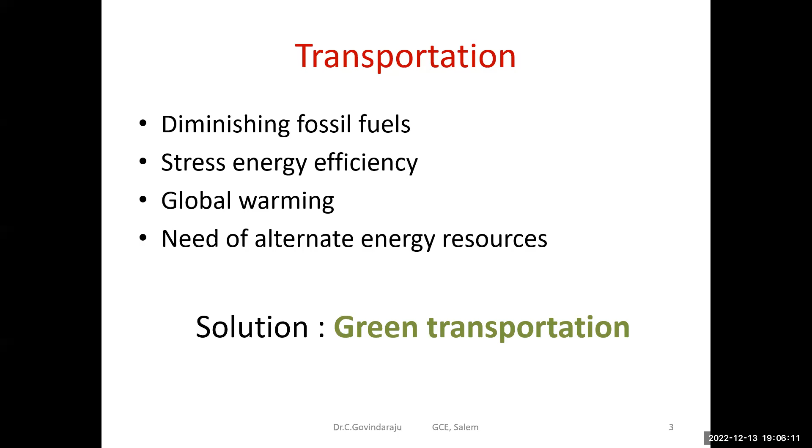So we think about alternate energy resources which can be used for transportation, that we can claim as green transportation. It means a vehicle which will not produce harmful gases to the environment. That kind of transportation we term green transportation. The electric vehicle is one kind of green transportation. An electric vehicle uses one or more electric motors as traction motors instead of IC engines, as in conventional vehicles, for propulsion.

We can classify electric vehicles as pure electric vehicles, hybrid electric vehicles, with the fuel cell electric vehicle as a kind of hybrid electric vehicle, and the third category will be plug-in hybrid electric vehicles. This is the broad classification of electric vehicles. The pure electric vehicle depends upon the operation of the electric motor alone for propulsion.

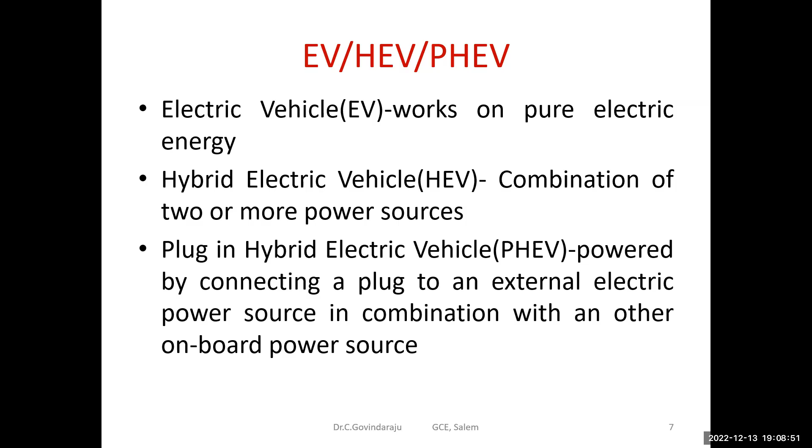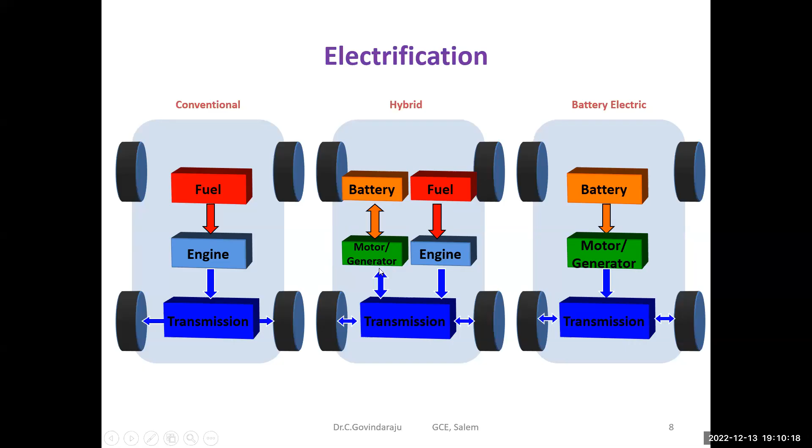electric vehicle. Whereas in the hybrid electric vehicle, we have two options for producing that mechanical power. One will be a conventional engine that is operated with conventional fuel. In addition to that, in parallel to that, the electric motor. These two operate independently and provide the mechanical power for the propulsion.

This is the basic structure of a hybrid electric vehicle, which combines two power sources or energy sources for electric propulsion. Basically we have a combination of a diesel engine with an electric motor. That is one combination. Another combination will be a fuel cell and battery. We are replacing the diesel engine with the fuel cell as the main source, and the battery is the secondary energy source for the electric vehicle.

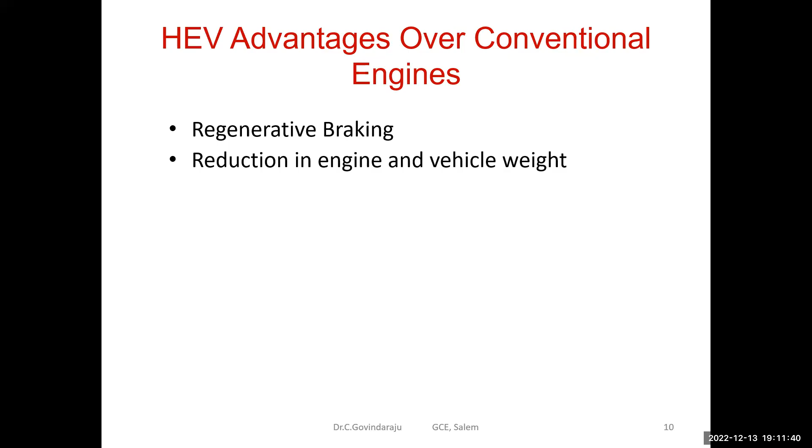Why do we need a hybrid electric vehicle instead of a pure electric vehicle, or instead of the conventional engine? First, it's capable of regenerative braking. In conventional vehicles we are using mechanical braking and the corresponding control is needed, whereas in a hybrid electric vehicle regenerative braking is possible, so it is more energy efficient compared to IC engines. Electric motors and the power converter supporting and controlling the electric motor have less weight, so that reduces the vehicle weight.

Definitely the fuel efficiency is increased. Actually, how the fuel efficiency is calculated in the conventional engine is very simple, because the fuel is the input to the IC engine, and some losses will be present. The remaining power is converted into mechanical power. That will be considered for finding the efficiency.

Whereas in the hybrid electric vehicle, we calculate the fuel efficiency starting from the fuels needed for electricity production, and also the conventional fuels needed. All the stages are to be considered for finding the fuel efficiency. Compared to the conventional vehicle, the electric vehicle and hybrid electric vehicle have more efficiency and fuel efficiency.

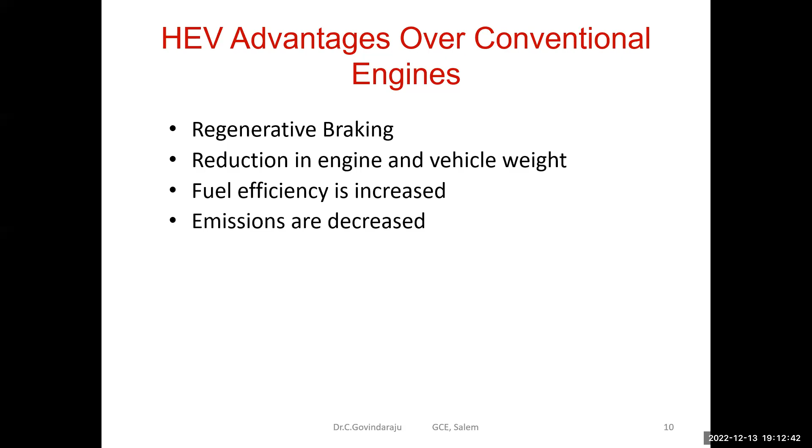Emissions obviously decrease. When you are using a hybrid electric vehicle, even combined with an IC engine, global warming pollutants are reduced by 1/3. Another thing is we are very dependent on fossil fuels, so by using hybrid electric vehicles we can reduce that dependency. Also, IC engines have low thermal efficiency, whereas electric motors have higher efficiency, so the overall energy conversion efficiency will be better compared with conventional engines. These are some of the features, so we are moving towards hybrid electric vehicles.

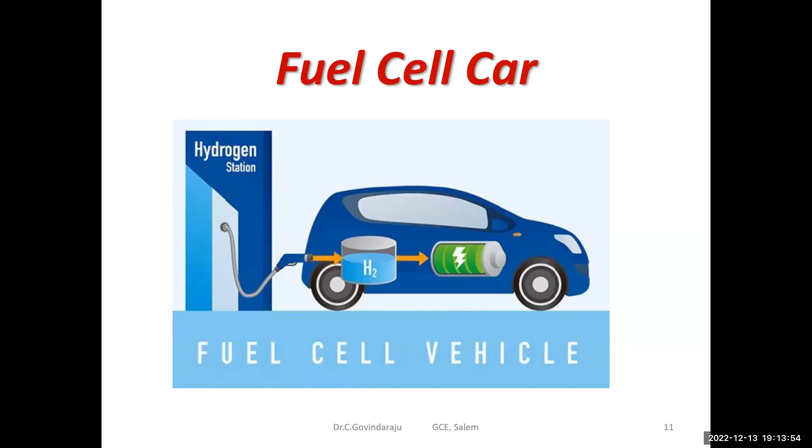Here we are looking at a fuel cell car. The fuel cell is the energy source for this car, so this vehicle is termed a fuel cell electric vehicle. A fuel cell is an electrochemical device which converts chemical energy into electrical energy in a single stage.

A fuel cell is very similar to a battery, but there is a big difference between a fuel cell and a battery. A fuel cell is an energy conversion device, which converts the fuel, normally hydrogen and oxygen, into electrical energy, whereas the battery is an energy storage system. It just stores the energy during charging, and when it is needed, the energy is taken back from the battery, that is, in discharging mode.

Here, the fuel cell produces electricity which is used for driving the motors and also powering the remaining electrical systems or accessories present in the electric vehicle. So we can claim the fuel cell electric vehicle as a hybrid electric vehicle. Again, it is purely electric in nature. It won't produce any pollution like a conventional hybrid electric vehicle, which operates with a combination of IC engine and battery.

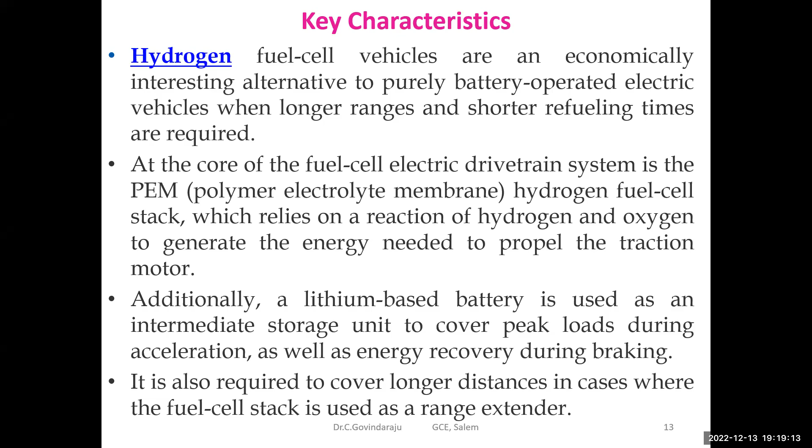Hydrogen fuel cell electric vehicles are clean in nature because they won't produce any harmful gases, and also won't produce a noisy environment. It is noise free operation, and it will not produce any pollution, so it is environmentally friendly.

And also, fuel cell electric vehicles are more efficient than conventional IC engines. We can easily refill the fuel. Here hydrogen is the fuel, we can easily refill it quickly, and it is suitable for long distance travel.

Another thing will be, we are claiming that hydrogen vehicles or fuel cell electric vehicles operate with renewable energy sources, because normally we are producing the hydrogen and oxygen from water, so the water is freely available, and so we can claim that it is quite environmentally friendly.

Another thing will be, here we can increase the travel distance or range by increasing the size of the fuel tank. So hydrogen is the fuel, so we need a hydrogen fuel tank for the fuel cell electric vehicle, whose size can be increased so that it can be modified for buses and truck vehicles.

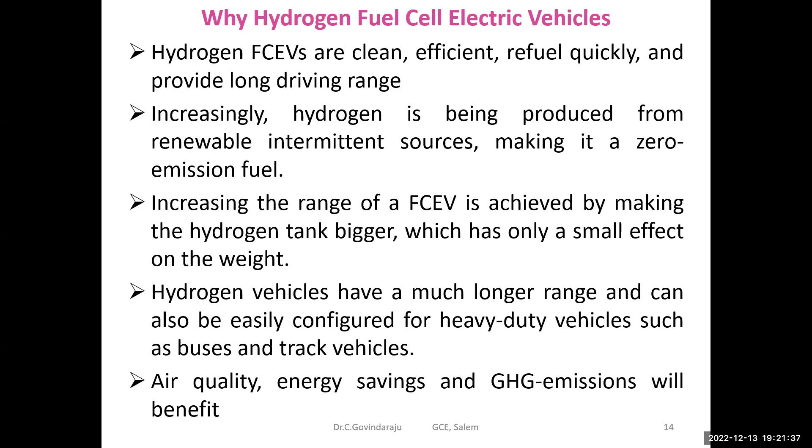Again, the battery operated vehicle needs electricity which depends upon the grid supply. Again, the fuel cell electric vehicle is a good choice compared to IC engine based vehicles. A small comparison shows how hydrogen as a fuel will produce more power than battery operated vehicles, compared to conventional fuels.

Even if you take the lithium ion battery, the energy density is around 600 kilojoules per kilogram, whereas hydrogen as a fuel has an energy density of 120 megajoules per kilogram.

Even assuming the efficiency of the fuel cell is around 30 percent, so 120 megajoules, of which 30 percent will be around 40 megajoules per kilogram. 40 megajoules means it is equivalent to 40,000 kilojoules per kilogram, and compared to 600, 40,000 is a much bigger number. So the hydrogen fuel cell is a good choice.

And it is, as compared to the battery operated vehicles.

This is a small introduction about the fuel cell electric vehicle. I want to start with the main modules present in the fuel cell electric vehicle. The main module is the fuel cell. We will look into how the fuel cell works, what types of fuel cells exist, what the basic characteristics of a fuel cell are, and what kind of supportive systems are needed when using a fuel cell for our electric vehicle.

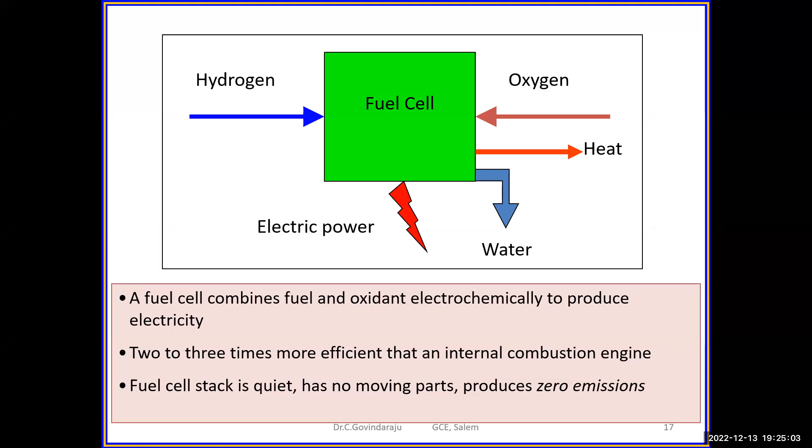Looking at the basic structure of the fuel cell, it is the simplest structure. It consists of an anode, a cathode, and in between there is a membrane. In order to speed up the chemical reaction, a catalyst is provided on the surface of the anode and cathode.

First, the anode. The anode is the negative part of the fuel cell. Basically in a battery, the anode is the positive terminal, whereas here it is a negative terminal. On the anode side, we give hydrogen as fuel, in which the hydrogen splits into hydrogen ions and electrons. The cathode is the other side of the fuel cell, the positive plate, in which we send oxygen.

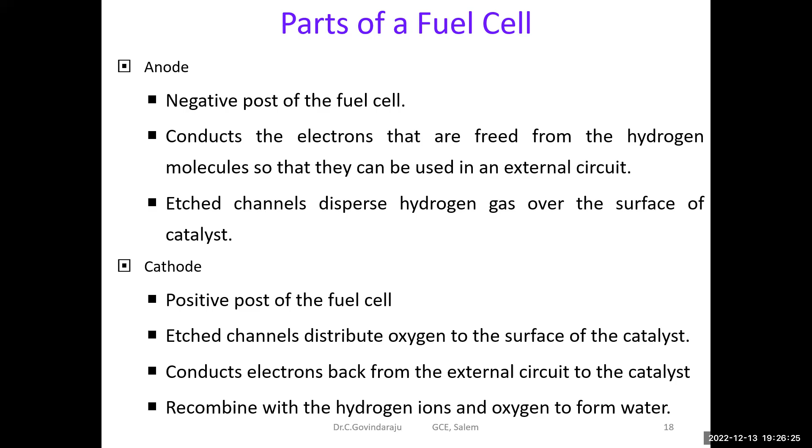There is a membrane called the electrolyte between the anode and cathode, called the proton exchange membrane. The speciality of this membrane is that it will not allow electrons through, it allows only ions, it blocks the electrons. On the anode side and cathode side, it is coated with catalyst to speed up the chemical reaction. A lot of research is going on to invent new low-cost catalysts; earlier they used platinum as the coated catalyst.

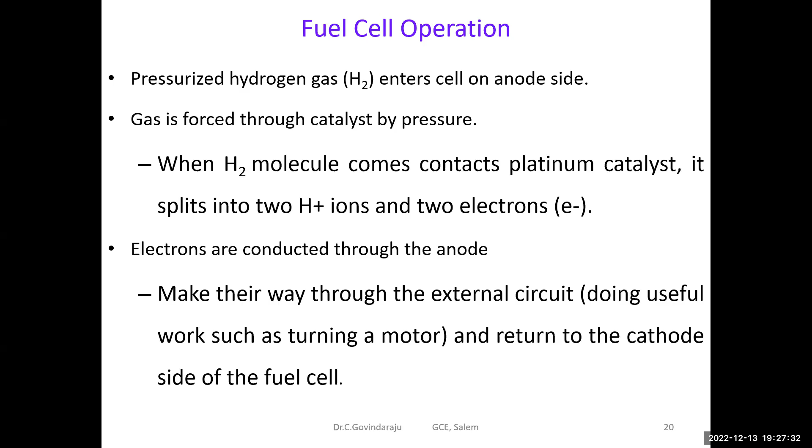The operation is very simple. We send hydrogen to the anode side, normally with a particular pressure and temperature, so that the hydrogen molecules split into H plus ions and electrons. This is about the anode part of the fuel cell.

This is about the cathode part of the fuel cell. On the anode side, we send hydrogen with specified pressure and temperature, and the hydrogen splits into H plus ions and electrons. Between the anode and cathode there is a membrane that allows only the H plus ions and blocks the electrons. So by force, these electrons move through the external circuit.

On the cathode side, pure oxygen is sent, and this oxygen combines with the H plus ions and the electrons coming through the external circuit to form H2O, which is water, a byproduct. During the chemical reaction, a huge amount of heat is produced, and because of the electron flow through the external circuit, we get DC output from the fuel cell.

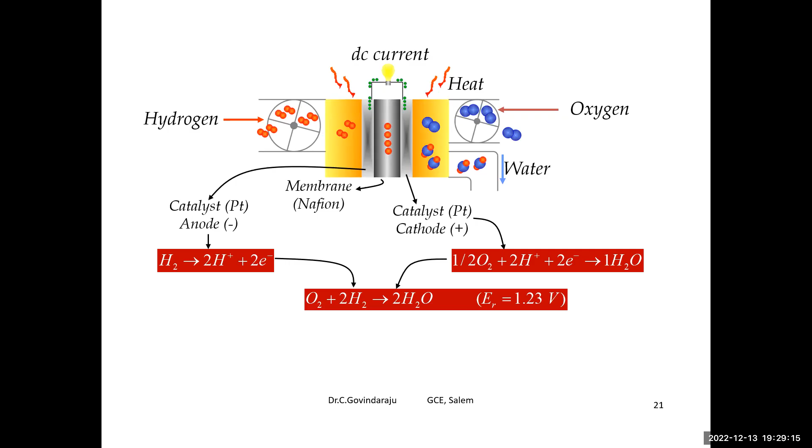Normally, a single fuel cell is capable of producing only a lower voltage and lower current. For example, the fuel cell voltage will be about 1.23 volts, which seems very low, and the current also will be very low.

This is about some chemical formulas which support fuel cell operation. Actually, the fuel cell converts the Gibbs free energy of the chemical reaction into electrical energy, under the isothermal condition, meaning it operates with constant pressure and constant temperature.

Gibbs free energy is the thermodynamic energy from the fuel, where the chemical reaction operates at constant temperature and pressure. This is the energy outlet from the fuel cell, equal to the change in Gibbs free energy. It is a reversible process, so the sign becomes negative, equal to N into F into E.

N is the number of electrons produced in the anode during the chemical reaction. F is Faraday's constant, and E is the reversible potential produced by the fuel. This is the energy equation of the fuel cell, representing the amount of energy produced during the chemical reaction.

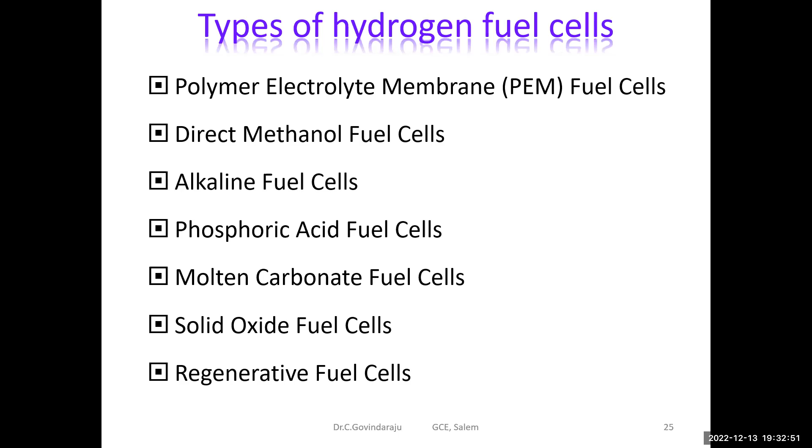Among these fuel cells, PEM fuel cell and alkaline fuel cell are more suitable for electric mobility applications. This is the broad classification of fuel cells, covering what type of electrolyte is used, operating temperature, stack size and power producing capability, efficiency of energy conversion, application domains, and advantages and drawbacks.

Among these various fuel cells, the PEM fuel cell is a preferable choice for electric mobility applications where the operating temperature will be less - that is one of the factors to be considered. Even though the stack power output will be around 100 kilowatt, the operating temperature is less, which is the primary requirement for vehicle movement.

Otherwise, we cannot operate the vehicle, and passengers inside would not be comfortable. The solid oxide fuel cell is more suitable for high power energy source applications, as a standby energy source. It is more suitable for grid integration and for residential and commercial buildings. Bloom servers come under solid oxide fuel cells, so they are more popular for standby power supplies and as DC gensets.

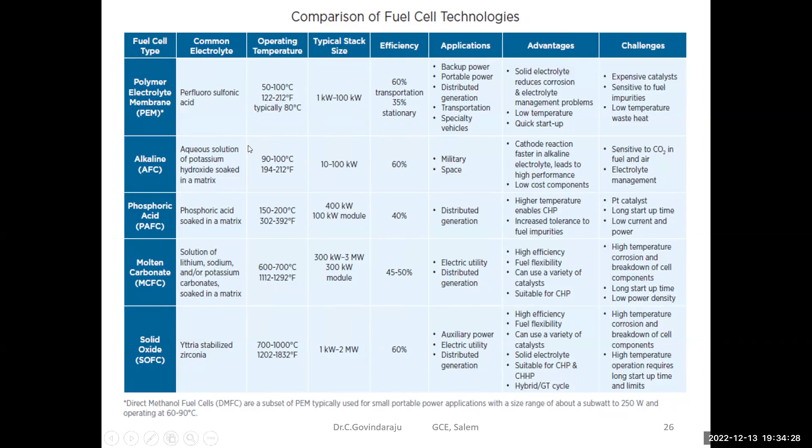This is how you choose the fuel cell for vehicle applications. It is based on size, because we need a compact fuel cell, and cost. This is a major factor because while the fuel cell is technologically a proven technology, commercially it is still not a success.

So there is still a question mark about the commercial availability of the fuel cell because of its cost. Other parts of the electric vehicle are fine, but the cost of the fuel cell is higher. Again, we have to choose the fuel cell which has a low cost.

And the fuel cell has a little slow dynamic, so the start-up transient time is also a very important aspect, because we want to quickly start the vehicle, we want to operate the vehicle immediately. Another thing will be the complexity of control needed for the fuel cell electric vehicle, because the fuel cell itself is complex in nature, and what kind of controller is needed for the fuel cell operation.

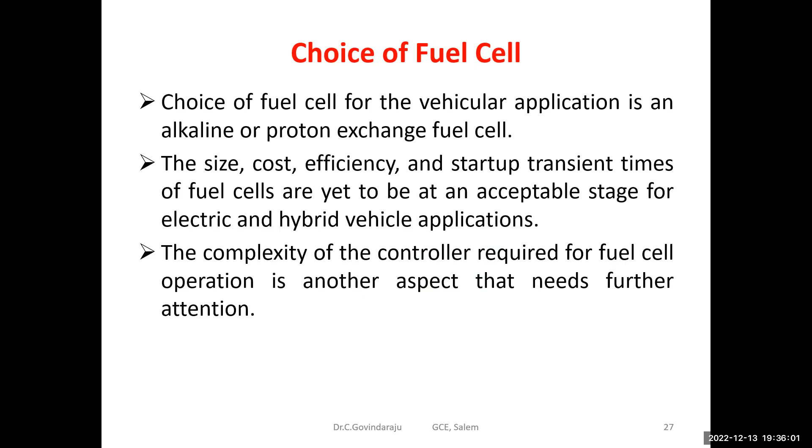Based on these criteria, the proton exchange membrane, that is a PEM fuel cell, is a good choice for mobility applications. These are the attractive characteristics of the fuel cell so that you can easily compare with respect to the other groups of vehicle. One thing will be a higher energy conversion efficiency. Higher energy conversion efficiency means compared to IC engines, not compared with generators.

So we can add any number of fuel cells in series and parallel. So the creation of the fuel cell stack is a modular structure. So we can increase the size as you like. That is the greatest advantage. Fuel flexibility: we can use hydrogen or we can use natural gas also. Low chemical pollution, it won't produce any harmful gases like your IC engines. Low acoustic pollution, it is a noise-free operation.

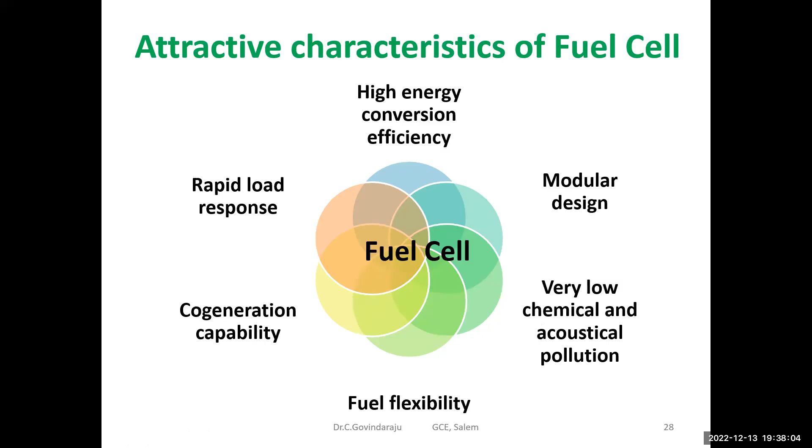It produces heat. That heat can be used for cogeneration purposes or other purposes. It has a better response with respect to quick load changes. Because of these features, the fuel cell is a more attractive option for electric vehicles. As already mentioned, the single cell is not suitable for practical use. So normally the cells are connected in series and parallel like a battery array. Here it is termed a fuel cell stack with a proper voltage and power.

So in the fuel cell stack, we have inlet and outlet valves, where the inlet valves are available for the hydrogen and oxygen feed, and we have the terminals available, positive and negative, for taking the output from the fuel cells.

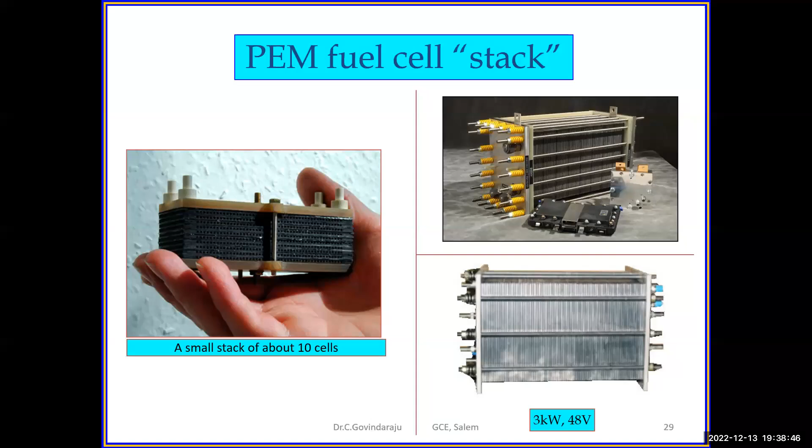But the final conclusion is that the fuel cell is not a stiff electric source because of the dropping voltage characteristic. The efficiency during energy conversion varies around 35 to 60%. It's not 90 or 95%, not possible. This is about the basic structure of fuel cell energy conversion systems. We are slowly introducing the power electronics in addition to the fuel cell for normal operation.

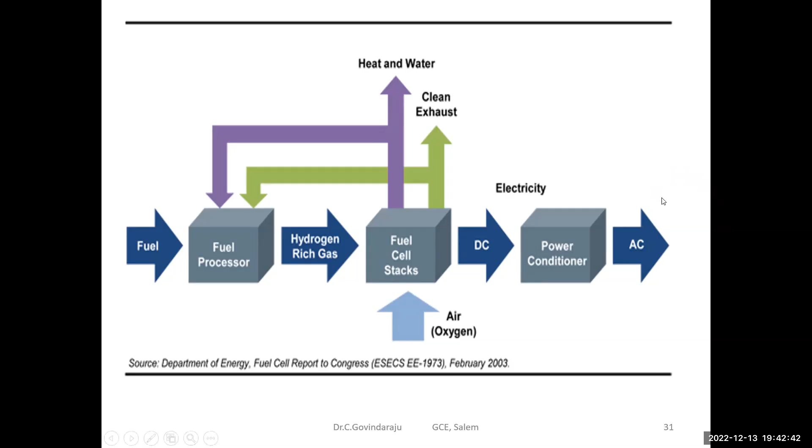And now we are slowly introducing the power electronics here. Here the DC output is low, variable in nature. So we need a power conditioner. First of all, converting that variable DC from the fuel cell into constant DC. And another thing, that DC will be a lower value that will be boosted, increased to a higher value. So we need a boosting function. And again, that DC has to be converted into AC for operating the electric motor. The preferable choice would be an AC electric motor for our electric vehicle operation.

This is about the volt-ampere characteristics of the fuel cell. The conclusion from these characteristics is the DC output is variable DC, it is a dropping characteristic. So this fuel cell output cannot be connected to the load or to the motor directly. So we need a DC to DC converter which will convert the variable DC into constant DC, and also the level of DC has to be increased. That is called a boost. So basically, we are using a boost converter that has a dual function.

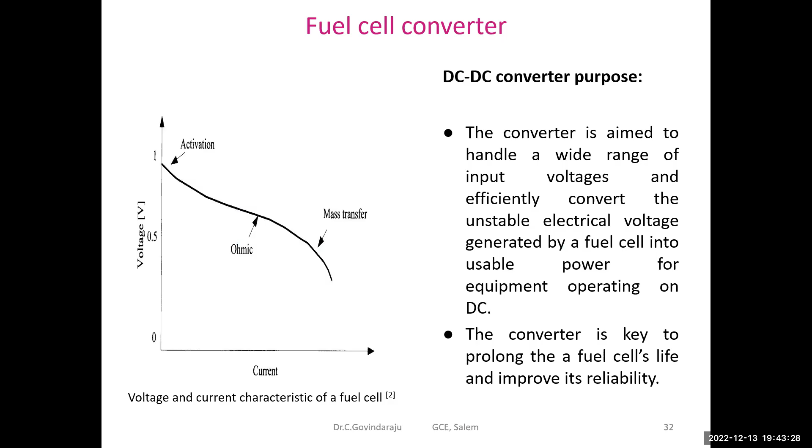This is about the role of the power converter. Without power electronics, we cannot operate the fuel cell or integrate the fuel cell with our electric vehicle. The fuel cell produces DC power. It is not a stiff DC source. A stiff DC source means voltage remains constant whatever the loading may be. It is a non-stiff DC source. So definitely we need an isolated or non-isolated DC to DC converter to make that DC constant. And we need an inverter which will convert constant DC into AC.

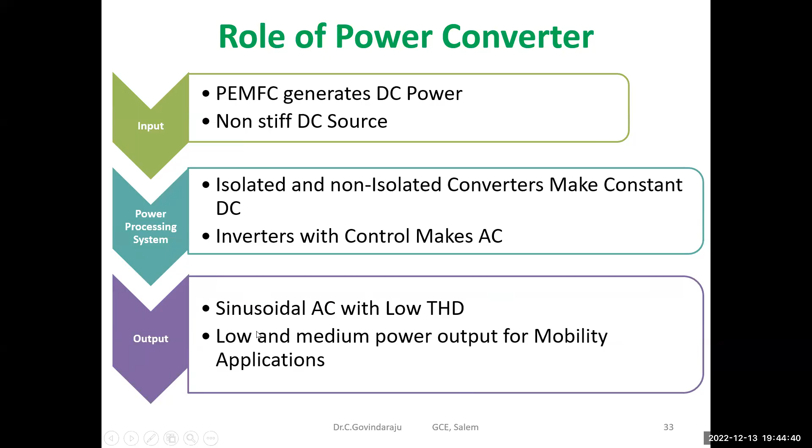Again, we need a variable voltage, variable frequency AC supply, which is needed for our motor drive control applications. And the AC should have a low THD, otherwise that will create some issues like torque ripple. Basically low and medium power output, which is suitable for mobility applications. This is about the two-stage power conversion needed for the fuel cell.

Again, when you want to design a fuel cell converter, meaning the DC to DC converter needed for fuel cell operation, it should be a single stage converter. A single stage converter has a higher efficiency than double stage converters. The converter size should be minimum so that we can easily accommodate it in the electric vehicle. Cost, obviously, should be low, and the converter should be reliable. So the converter should be fault tolerant.

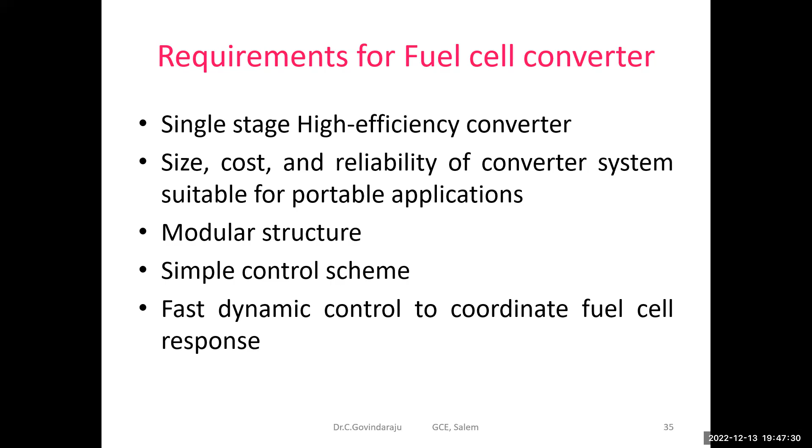The fast dynamic control. So obviously the converter has fast dynamics, so there is no problem in that, so that it can coordinate with respect to the fuel cell output.

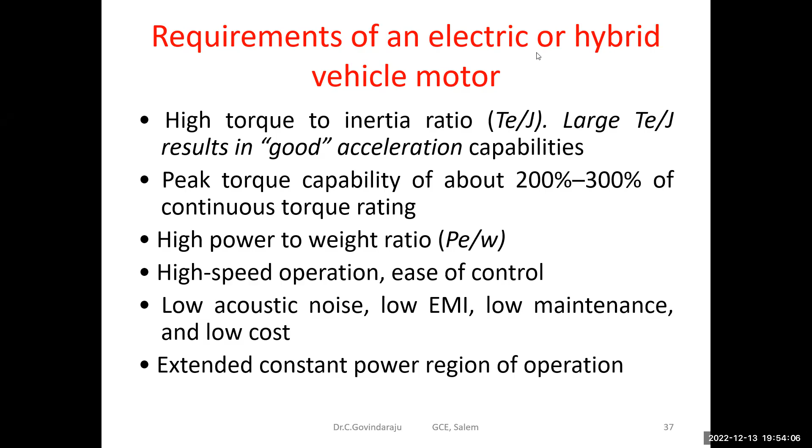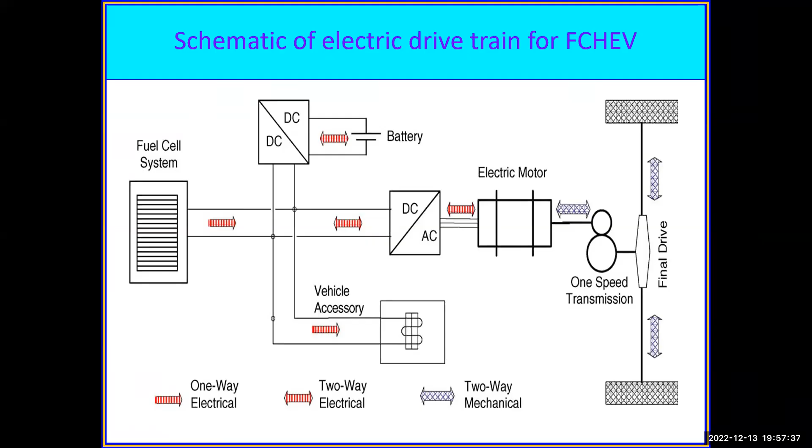And this is the mechanical power produced by the motor, which is variable in nature. The advantage of the electric motor is we can control it; we can operate the electric motor with specified speed and specified torque. So here the gear changing mechanism is not needed. It is directly coupled with the vehicle shaft. There is no need for a gear changing mechanism. There is one-speed transmission.

One thing will be the transient of speed. We operate the vehicle in different modes: starting, then running. Running may be upslope or downslope. There we need to increase the speed or decrease the speed. There is an acceleration mode and a deceleration mode. Again, we want to apply a brake; there is braking or stopping. These are the modes we need.

How much time does it take? For example, I am operating the vehicle at 60 kilometers per hour. Suddenly, I want to increase the speed to 100. So what is the transient time needed from 60 to 100? That is very important. And for that, does the fuel cell system support it, or does it need any additional support?

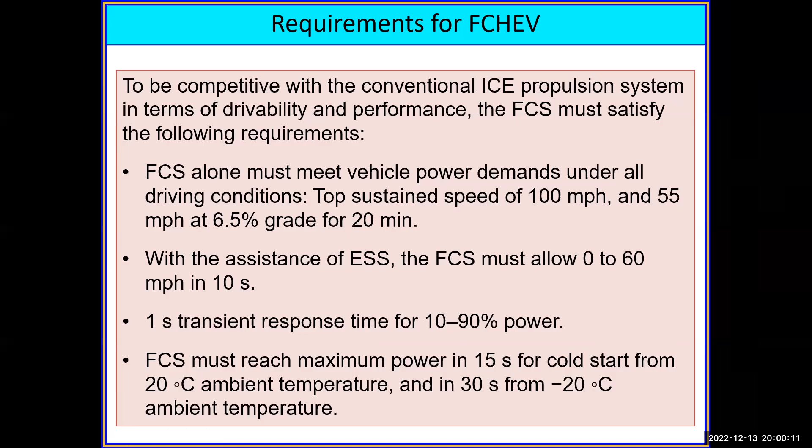And also, it should produce the maximum power, for example, while starting. The fuel cell has to start quickly and produce the maximum power, even when the temperature is very low. Because the climatic conditions are not the same in all countries. Some countries have cold climatic conditions, where the temperature is sometimes even negative degrees Celsius. Even in those conditions, the fuel cell has to start and produce power, because we want to operate the vehicle anyhow.

Actually, there are two types of fuel cell electric vehicle. One is a series fuel cell electric vehicle. Another one is called a parallel electric vehicle. Here, the fuel cell stack will be a small size, the battery will be bigger size. The battery rating will be same as your motor rating. Actually, this is a battery operated electric vehicle powered by fuel cell.

In the second case, that is called parallel architecture. The fuel cell stack size will be same as the motor size. Here, the battery will be a small size that will be a secondary energy source. Here, the fuel cell will produce the power. That power is used for motor operation. That is used for propulsion.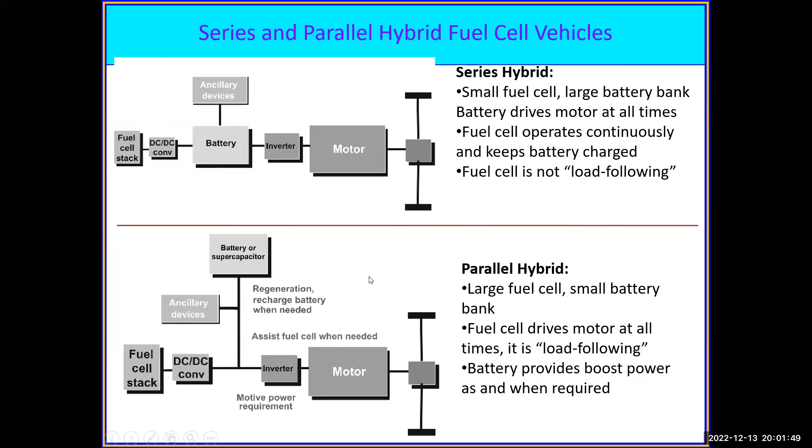During the fuel cell operation, if there is an excess of power, it is stored in the battery, and that supports accessories and sometimes acceleration or deceleration in addition to stopping. And mostly we prefer this kind of architecture for fuel cell electric vehicle. This is kind of the power flow diagram.

What kind of nature of DC to DC converter is needed? So normally the fuel cell needs a DC to DC converter, that is the boost converter. That is a normal DC to DC converter, with unidirectional power flow. Whereas the converter needed for the battery supports charging and discharging. It means that energy flow will be in two different directions.

So here we are using a bidirectional DC to DC converter. Here we are using the unidirectional DC to DC converter. This is about the discharging from the battery. This is about the charging of the battery. Still a little more improvement. Still you need a very fast dynamic response from your vehicle.

You have to add one more energy storage device called the supercapacitor. As compared to the battery, the supercapacitor is highly dynamic in nature. It is capable of supplying a larger power in a quicker time, and also it is capable of charging a large value in a shorter time. So under the normal operation there is no role of supercapacitor. Under the normal operation the fuel cell is giving power to your drive.

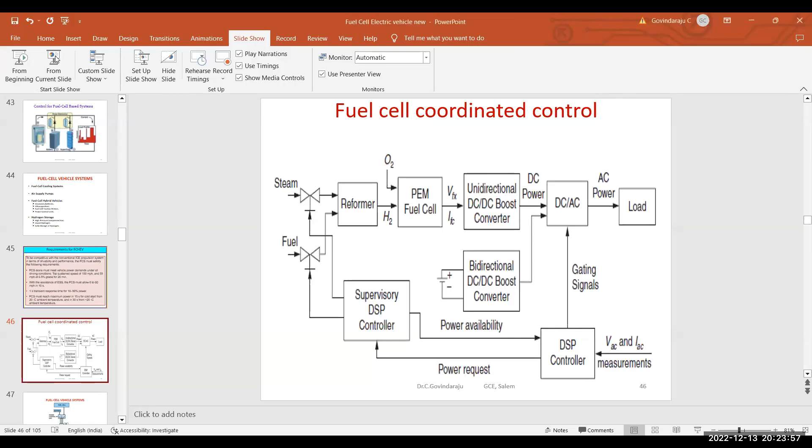This is about the fuel cell coordinated systems, where we need a separate fuel cell control system for the fuel cell operation and a separate control system for the power electronic controller needed for our electric motor drive, which is needed for our electric vehicle.

This is about the main DSP controller. Similarly, there are some DSP controllers available that take care of individual part control. This supervisory DSP controller will take care of controlling the fuel. Actually, the fuel will be combined with steam, that is called reformed fuel, which is given as an input to the fuel cell in order to improve the energy efficiency.

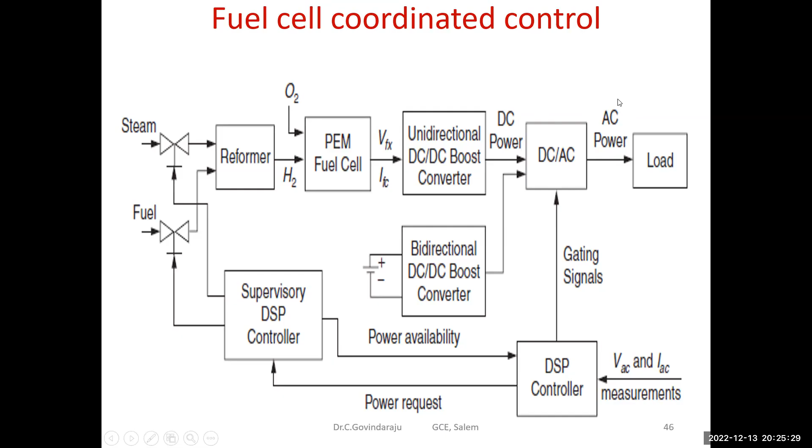And this operation, you have to control the DC as well as the AC. In addition, there are control signals from the main controller that control the inverter operation so that the AC power will be controllable, which is needed for the electric motor drive.

Here we are using two sources. One will be the fuel cell, the main source that provides a constant electric power output, which helps for stable operation. Normally the fuel cell runs continuously with a particular power output so that energy conversion efficiency will be high, and it operates at the maximum power point, producing maximum output power.

In addition to that, the batteries support the variation in energy during that energy conversion.

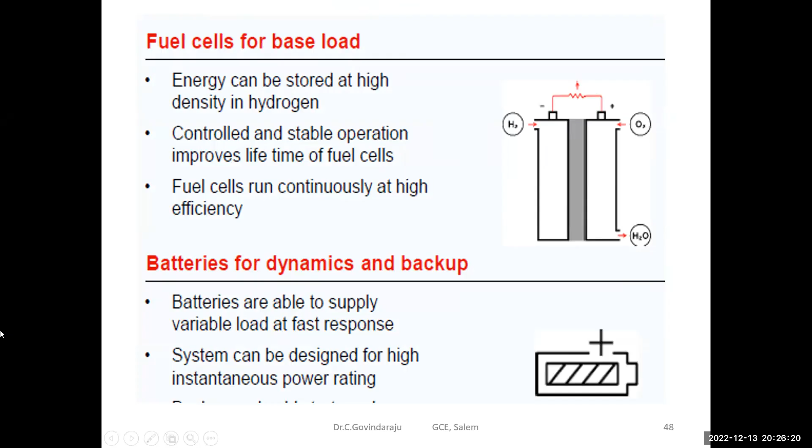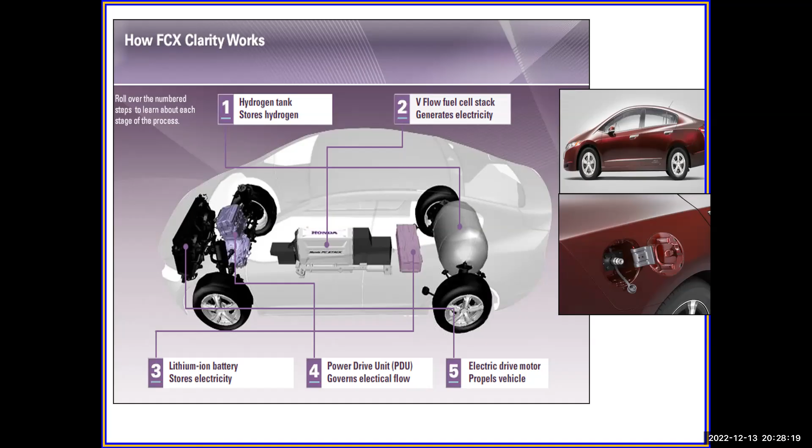This is the simplest structure. Nowadays a lot of new technologies are coming in the automobile industries, especially for fuel cell electric vehicles, mostly for a sophisticated environment. So here we are looking only at the fuel cell electric vehicle drive systems.

The major components present in the fuel cell electric vehicle are the fuel cell electric air compressor, fuel cell pump and fan - we will look at all the parts - the fuel cell DC to DC converter, that is the boost converter, the fuel cell control unit that takes care of the fuel cell operation, the safety and security module, traction inverters, and high voltage traction batteries.

In addition to these major modules, we need some supporting subsystems for the fuel cell electric vehicle. The main important one is the super insulated double walled hydrogen tank with a pressure of 350 to 700 bar. This is very important because when thinking about fuel cell electric vehicle safety, if the fuel tank is safe, the vehicle is safe. The remaining parts of the vehicle are not an issue.

Next is the hydrogen ejector and hydrogen pump. We normally feed the hydrogen at a specified pressure and temperature, where we have to regulate the pressure - that is done through the hydrogen pump. The air compressor, already mentioned, is responsible for taking air, purifying it, and sending pure oxygen. The fuel cell pump and fan take care of thermal and water management, because during fuel cell operation a huge amount of heat is produced.

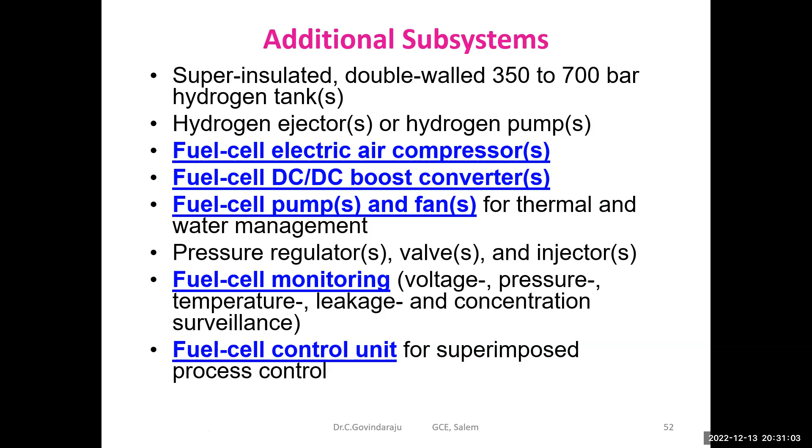Here we are looking only at the major parts. The major parts will be the air compressor. We know that the fuel cell needs pure oxygen in order to produce electricity, which is normally fed in the cathode side. That air is taken from outside, purified, and fed into the cathode side.

Another thing will be, the main role of the air compressor system will be controlling the airflow rate, because we have to send the oxygen at a particular flow rate with a particular pressure. So these parameters need to be monitored and controlled. Another parameter to be considered while designing the air compressor is that it should be efficient.

It should be efficient and dynamic over a wide speed range, because we want to control the fuel cell by controlling the fuel as well as the oxygen. It should be compact, modular in nature, so that the size can be easily increased when needed. Low noise emission, it should not produce any noise during operation. Safety.

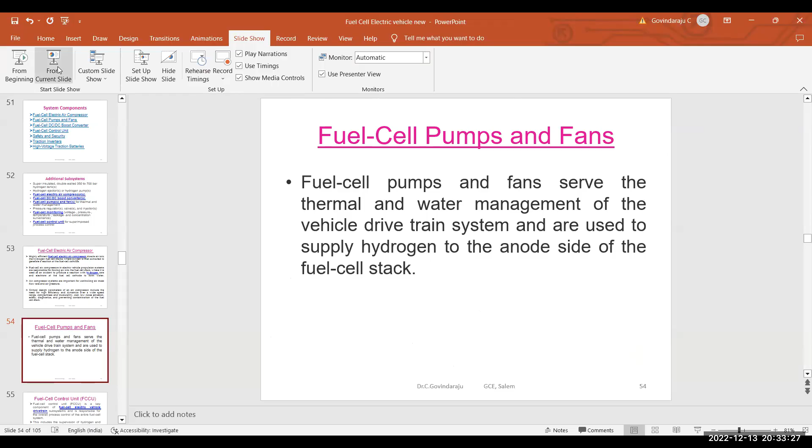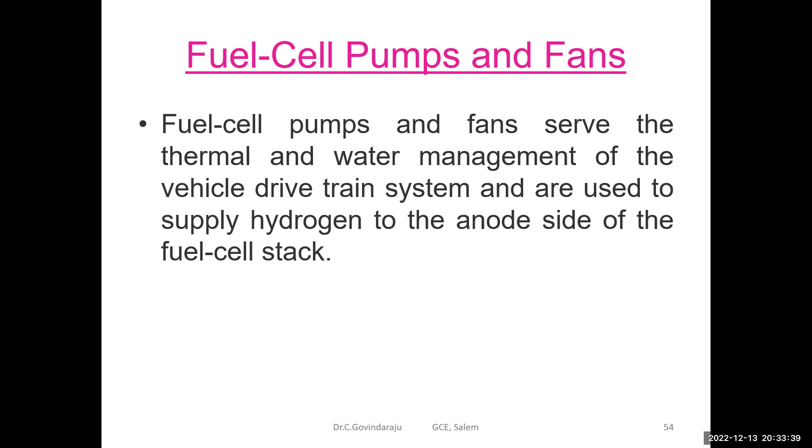The fuel cell pump and fan will take care of supplying the hydrogen and regulating the pressure. It will also take care of the thermal management, because the heat has to be properly dissipated through the radiator via the fuel cell pump.

This is the main unit for fuel cell control and operation. This will control the total process of the fuel cell. It will take care of the supervision of hydrogen injection, airflow rate, thermal management - meaning cooling system management, energy conversion, and all safety and security issues.

Sensors are placed at all the relevant points, and based on the sensor output, it will monitor, and if any abnormality is identified, it stops the total process. In addition to that, it has to provide power to the load requirement, so there is close interaction between the fuel cell controller and the powertrain domain controller.

Another important thing, already mentioned, is that the fuel cell DC to DC boost converter plays a very important role - it interfaces the fuel cell stack output with the traction inverter, and also interfaces the fuel cell output with respect to the traction battery.

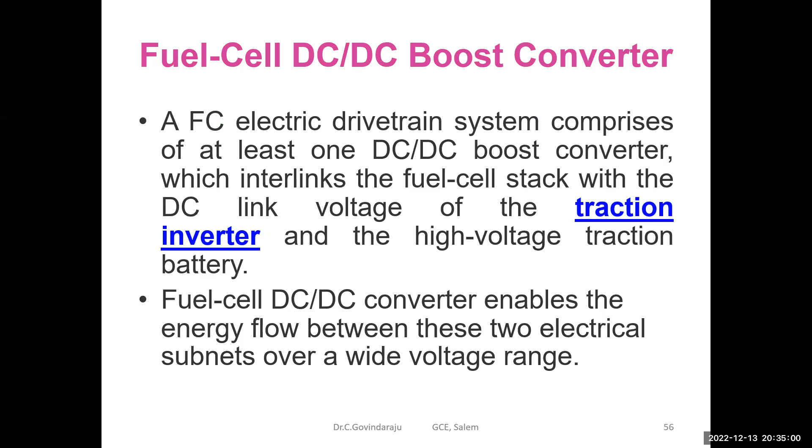So how are we designing the DC to DC converter? When you are using conventional MOSFETs and IGBTs, the problem is the size of the converter, because the fuel cell is supplying around 100 kilowatt power, which has to be handled at that 100 kilowatt power level needed for our traction inverter. So the size of the converter should be bigger.

So instead of increasing the size of the converter, in the present scenario people are using silicon carbide power modules. Silicon carbide IGBT modules and silicon carbide MOSFET modules are available, which have low switching and conduction losses, so the efficiency of the converter will be a little higher.

When you talk about converter ratings of, for example, 500 watts or 300 watts, there is no issue about conversion efficiency losses. Whereas when you think about the converter for 100 kilowatts, then those losses play a major role and efficiency plays a major role. So silicon carbide power devices are chosen because they have low switching and conduction losses, even at very high switching frequency, which improves the converter efficiency.

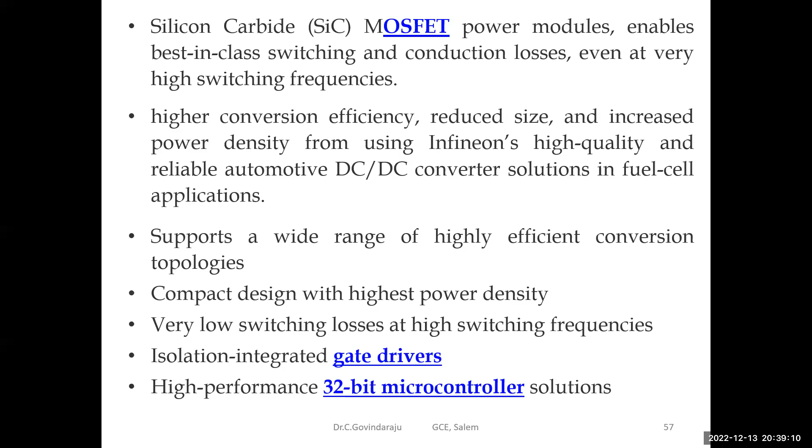This is a very important unit for the fuel cell electric vehicle: the traction inverter, which controls the fuel cell electric motor responsible for the vehicle's driving performance. The total drive performance is based on motor control. You need smooth control and smooth operation over the vehicle, and for that, motor performance is decided by the traction inverter. Traction means the inverter which is suitable for your traction motor, that's all, nothing else.

What about the power rating? The power rating will be the same as the motor. For example, when using a 100 kilowatt electric motor, you need a 100 kilowatt traction inverter, where silicon carbide IGBT modules are used, controlled by the digital signal controller, taking care of conversion efficiency and thermal efficiency so that it is suitable for long drives. Why does thermal efficiency need to be improved? When you operate a 100 kilowatt inverter continuously, there are losses, for example conduction losses and switching losses, which will...

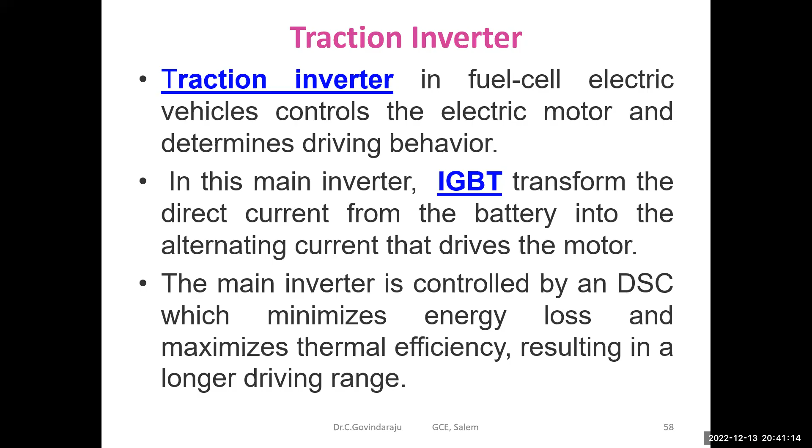The motor will operate in different modes: starting from zero speed, then acceleration, increasing speed from one level to another, deceleration, decreasing speed from higher to lower level, stopping, and again regenerative braking. So all these operations are controlled by this inverter.

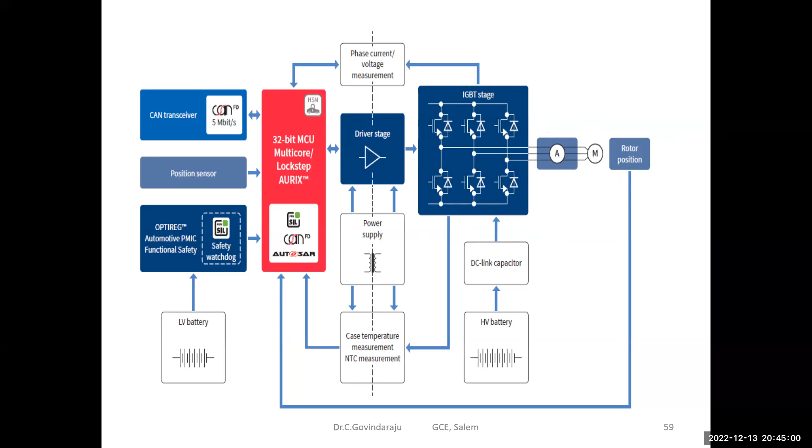Actually, when you think about the normal inverter, that will have slow dynamics. So we want the dedicated inverter module which will be suitable for automobile application; that should have a higher dynamic response, and that should be fault tolerant. Okay.

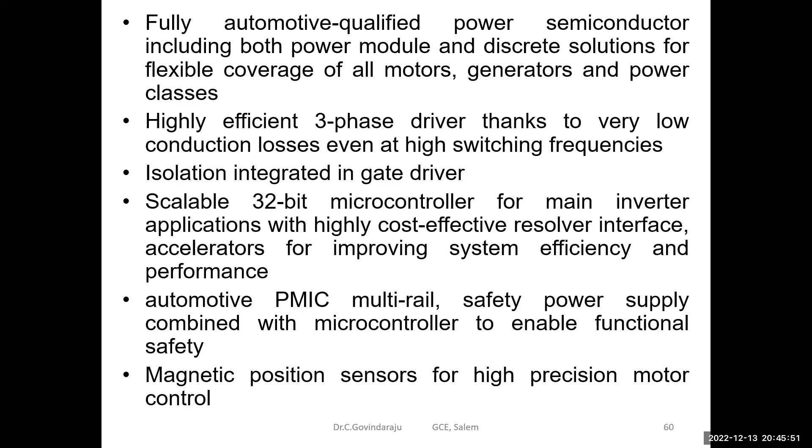These silicon carbide power modules are available for automobile applications. These high power density power modules are more suitable for electric drive applications, especially for fuel cell applications.

The main advantage of selecting the silicon carbide devices is that it has a higher power density, less cooling effort, and less number of passive components, so that we can reduce the size of the power module, so that it is compact and can be easily fitted to your electric vehicle.

In the traction inverter, again I mentioned that it is a high power inverter, where the conventional VSI, I mean voltage source inverter, or current source inverter, is not suitable. We need higher end PWM inverters for this particular application.

Normally, when you choose the two level inverter for high power applications, these devices are connected in series, but practically speaking, it is available in a module. So this is called the device pack. So we can use the device pack instead of a single device for designing a three-phase inverter, which is needed for our traction applications.

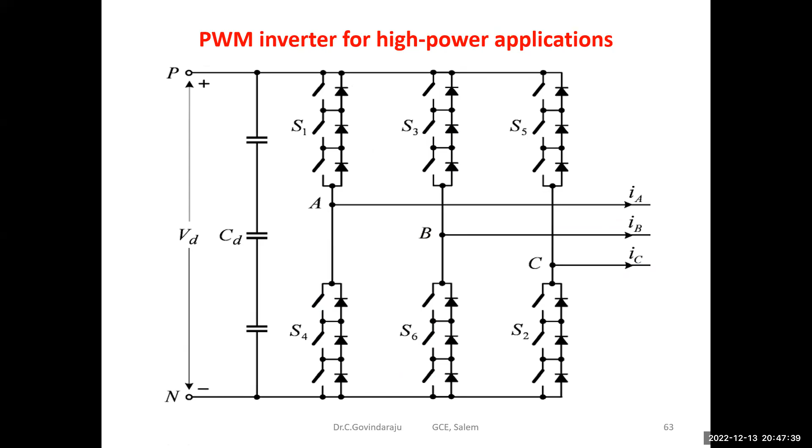Again, normally the inverter control is possible with the help of sinusoidal modulation or space vector modulation. Sinusoidal modulation is quite compact, easy to control, and practically easily realizable. So the sinusoidal pulse width modulation is selected for the traction inverter control, where we can easily control the voltage, we can easily control the frequency, and the output should have low THD.

If it contains a higher THD, especially negative sequence harmonics, these will produce torque which is opposite to the original torque, so that will cause some issues with the drive's operation. So while designing the traction inverter control, you have to take care of the negative sequence harmonics. Positive sequence harmonics are no problem, but the negative sequence harmonic is dangerous for the electric vehicle application; it will damage the mechanical coupling.

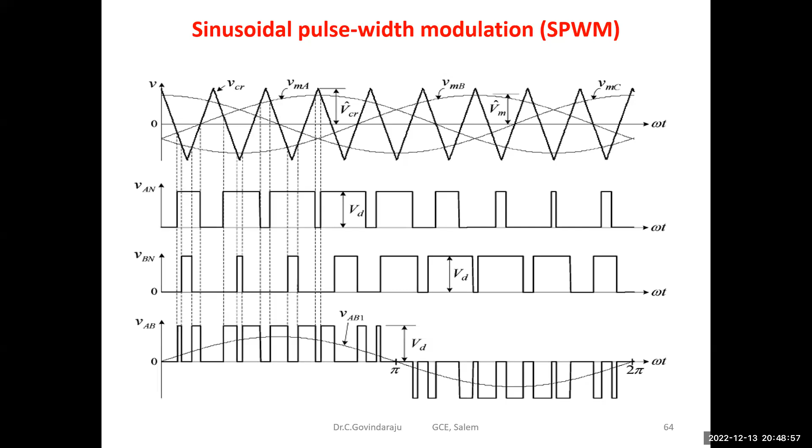The other choice for the high power inverter, for example 100 kilowatt inverters, is multi-level inverters. A multi-level inverter is a power conversion system composed of power semiconductors with capacitive voltage sources that will produce a variable voltage, variable frequency stepped waveform which will be closer to a sinusoidal waveform. So no separate filter is needed for multi-level converters.

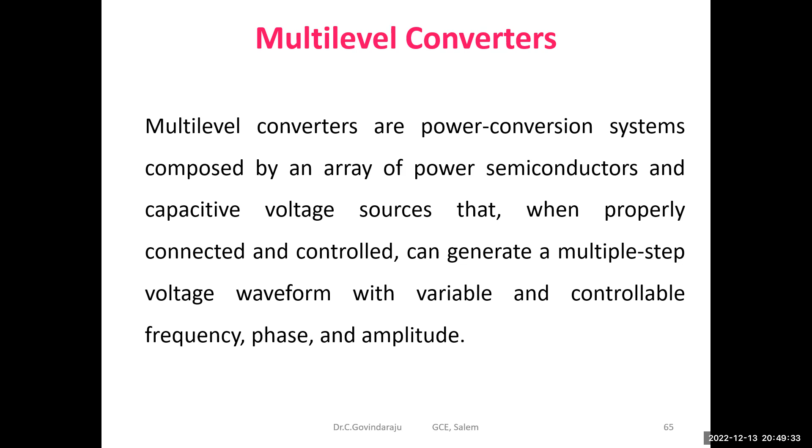When you are selecting the multi-level inverter as a traction inverter, it has low harmonic distortion, which is essential for the motor performance and also important for the torque ripple, and the reduced voltage stress on the power devices improves the lifespan of the inverter.

Okay, low acoustic noise and EMI, because this is a very important aspect while designing the traction inverter. For example, when you select a 100 kilowatt inverter that has a high EMI problem, it will interfere with the communication devices used by the passengers. So for example, when you are operating your laptop or your mobile with 5G or 4G, that will be interrupted by the EMI produced by the inverter, which is a part of the drive control.

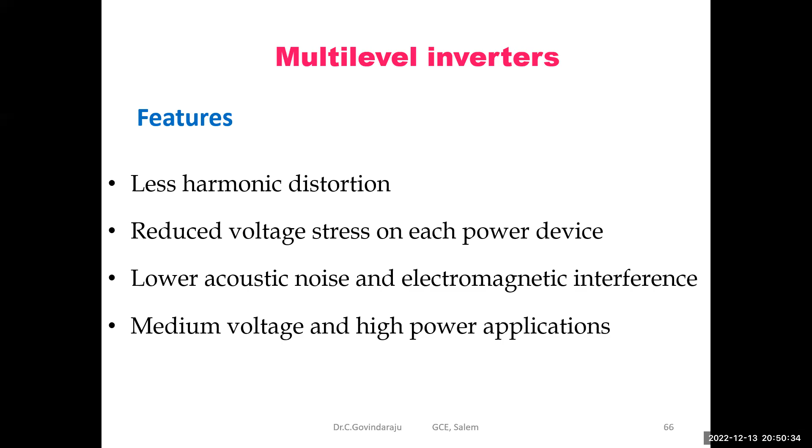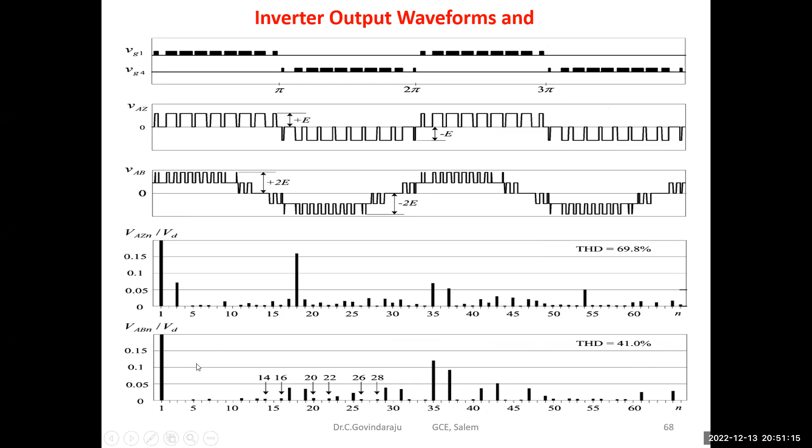This is the harmonic analysis without filter. So if it is connected to the motor load, all higher order harmonics will be eliminated. For example, here all the higher order harmonics are eliminated. Only a few lower order harmonics will be present, which can be easily filtered out.

Then another option: if you go for bidirectional operation, for example when you select a 100 kilowatt inverter, sometimes it will operate as a converter and sometimes as an inverter, a dual function. So the modular multi-level inverter is the best choice for bidirectional operation.

It is mostly used for grid integration of solar PV systems and wind energy conversion systems. The features of the modular multi-level converter are more suitable for our electric vehicle operation. Again, it is up to you.

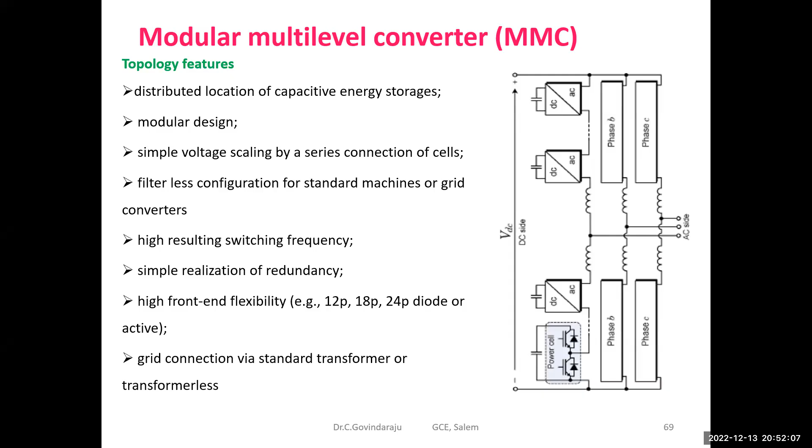In addition to the normal fuel cell DC to DC converter, we need a high voltage and low voltage interface DC to DC converter, because normally in the vehicle two different kinds of batteries are used. One is the high voltage battery, called traction batteries, and the other is low voltage batteries. The low voltage batteries take care of the vehicle accessories.

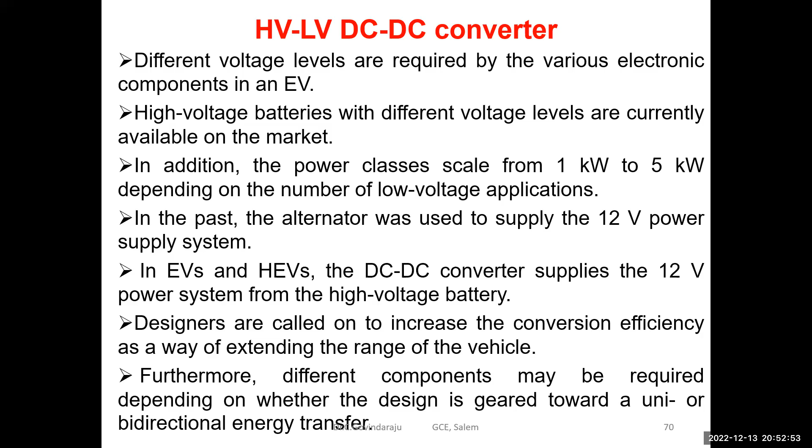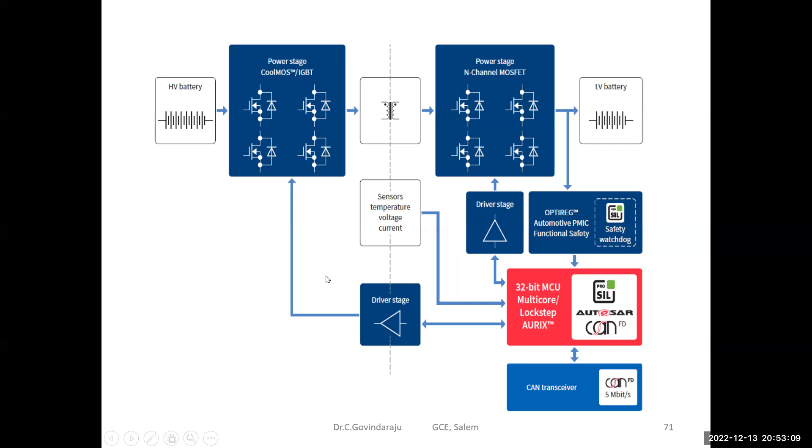So the converter must be suitable for interfacing the high voltage traction batteries as well as the low voltage vehicle accessory batteries. Normally this is the design: high voltage battery and low voltage batteries, and the power exchange between them, which is sensed and controlled by the microcontrollers.

This is called the auxiliary inverter. The main inverter supports the electric motor for propulsion. The auxiliary inverter supports the auxiliary drives, which are used for HVAC application, that is, the heating, ventilation, and air conditioning unit. When you are using this module, it should be energy efficient.

Nowadays, even in our home applications, inverter ACs are available. It means that the compressor speed is adjustable with the help of PWM control methodology. That's all, nothing else. The same principle can be applied to HVAC systems, that is, heating, ventilation, air conditioning.

In our car, we have three options: heating, cooling, and fan operation. That is called HVAC operation. It is normally done through the drive, and the drive is controlled with auxiliary inverters. Again, it improves the energy efficiency. When you go for energy efficient control, you can reduce the size of the battery. That is the advantage.

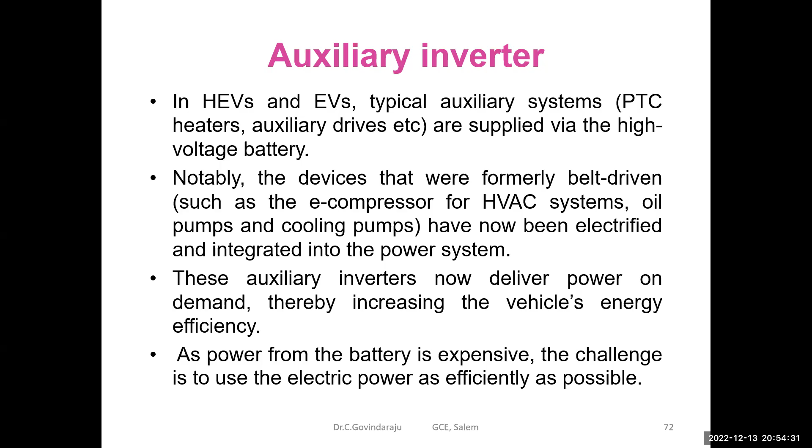So while selecting the electric motor, what are the points to be considered? Our conventional electric motors cannot be used, so we definitely need a dedicated design for electric vehicle operation. In electric vehicle operation, we need a power converter plus electric motor, because we are not operating the motor constantly; we operate it at different speeds and different torques, which is controlled through the power electronic systems.

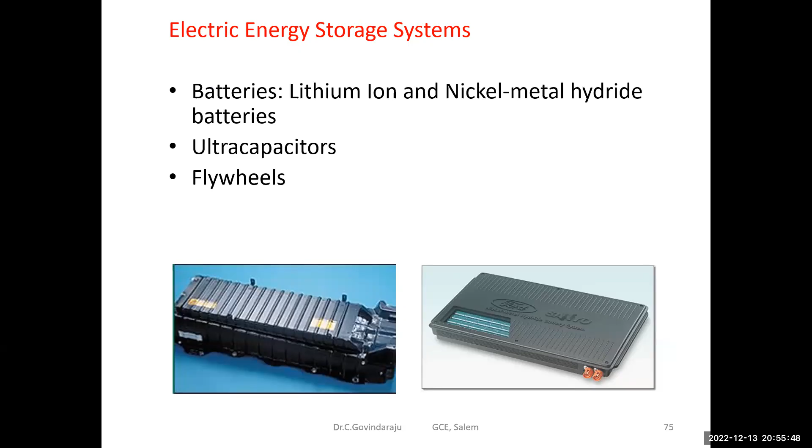I think we have mentioned energy storage systems. Energy storage systems support the acceleration, deceleration, and braking operations in addition to the motoring operations. Normally we have a battery pack, where the batteries are connected in series and parallel, for energy storage.

And as I already mentioned, when you select the motor, it should have a high power density. The normal motors cannot be used. We need small size, very high power output motors with good power control and higher dynamics.

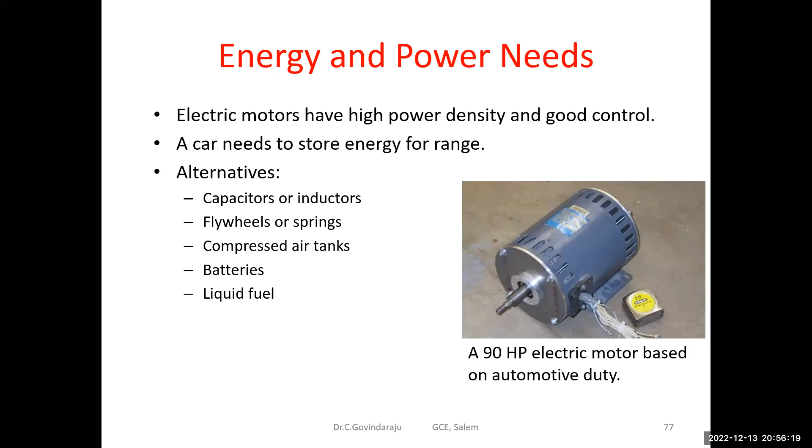Power requirement is not a constant. For example, when you are operating the vehicle on a normal road at a normal speed, the power requirement is less. When you want to suddenly increase the speed, you have to provide a higher power. So during normal operation, the power requirement is normally less.

The power requirement will be more during starting and during acceleration. Within a short period we are giving more acceleration to increase the speed very quickly, so at that time it needs more power. Normal operation needs just 20 horsepower.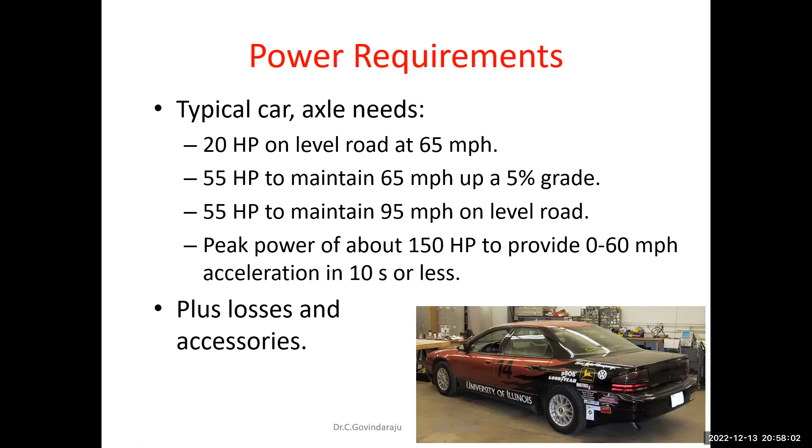When you are increasing the speed from 65 to 95 on the normal road, you have to apply higher power. Even with these speed transitions, normally when you start the vehicle, we are giving more acceleration to increase the speed quickly. So at that time we need a peak power. In addition to that, there is the power requirement for the accessories, and there are losses in all the modules.

While selecting the battery, you can look into the power density. Based on that, you can select the batteries. Normally, lithium-ion batteries are used.

While selecting the electric machine, not motor, because the same machine can be used as a motor or generator: motor during normal vehicle operation, generator during the braking operation. It should be an energy efficient motor with high conversion efficiency, so it will take lesser power. If it takes lesser power, we can reduce the size of the battery and the fuel cell stack. When you reduce the fuel cell stack size and the battery size, you can reduce the space and the cost.

This is the advantage. So while designing the sub modules of the electric vehicle, wherever it is possible, each should be a highly efficient one. It should also not increase the vehicle weight.

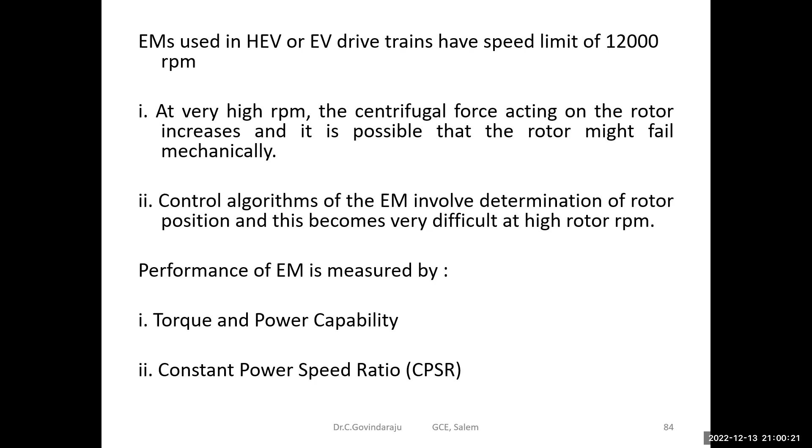Sometimes it takes intermediate power in between the rated power and the peak power. Peak means the maximum power. So the motor has to supply both the constant torque region and the constant power region. The peak power output is only for a short time.

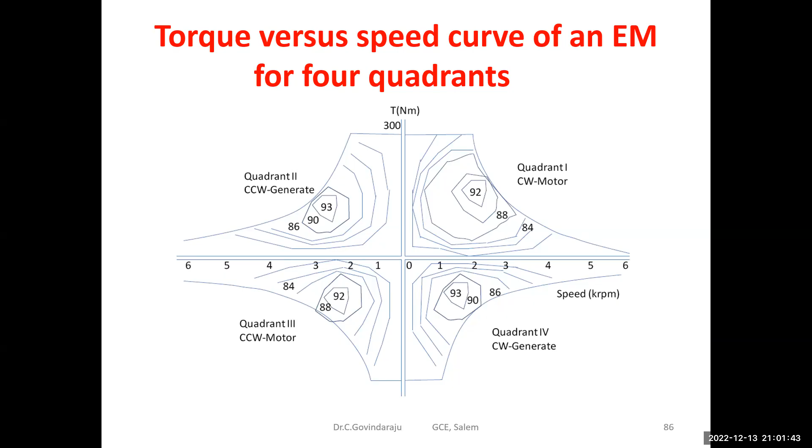In addition to that, the motor should operate in all four quadrants, because we are operating the vehicle in the forward direction as well as the reverse direction, and we are applying a brake while driving the vehicle forward and while driving in reverse. So your vehicle should operate in all four quadrants.

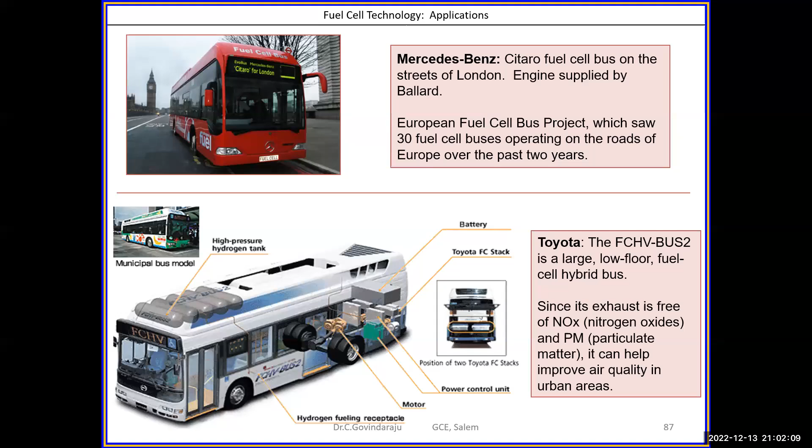These are the application areas. Not only cars; fuel cell vehicles are popular for buses and trucks. Mostly manufacturers are thinking about high power vehicles. These are trucks, buses, delivery vans, refuse vehicles. All of these are more available in the market in foreign countries.

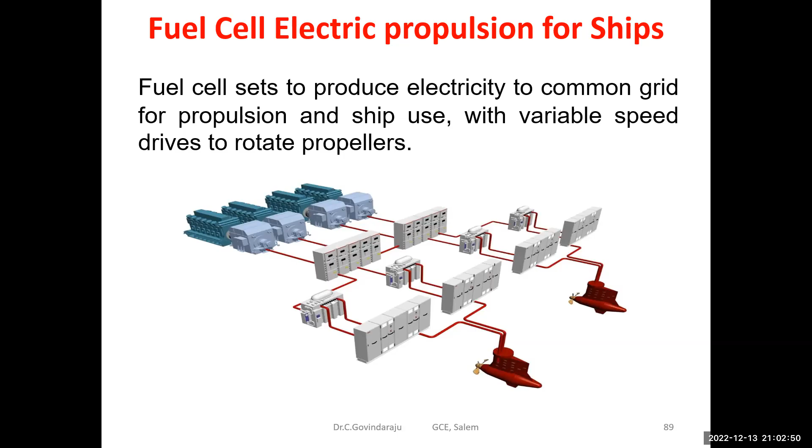This is fuel cell electric propulsion for ships. Even the government of India, the Indian Navy, has a fuel cell electric ship with electric propulsion, where cost is not a major factor. So they use fuel cell systems for driving the ship. These are some of the models available.

Another major aspect is the hydrogen storage system. We need a dedicated hydrogen tank that should be fully insulated, with double coated, double wall systems for storing the hydrogen.

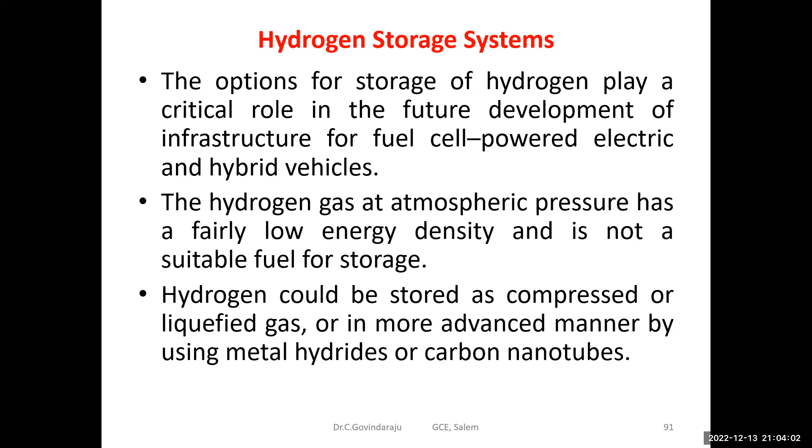Hydrogen gas at atmospheric pressure has a low energy density, so directly it is not suitable. The hydrogen has to be compressed, in liquid form, or in more advanced ways with the help of metal hydrides or carbon nanotubes, and stored in the hydrogen tank. Normally it is stored in liquid form.

So when you are compressing the hydrogen, you need more pressure. So you need dedicated systems for compressing the hydrogen and storing it in the fuel tank.

Yeah, so a very important thing will be whether it meets the safety matters. One thing will be the electrical safety. The regulations are available, so the electric vehicle should meet these kinds of safety standards. One thing will be the protection against electric shock. So you have to provide proper wiring inside that electric vehicle that should not damage the passengers.

Another thing is we are using refrigerant HVAC systems that should not compromise the electrical safety aspects. In addition to that, the fuel safety, and when the vehicle is subjected to an accident or a collision, what are the safety standards to be maintained? All these things must be met, whether it is the battery operated vehicle or fuel cell electric vehicle.

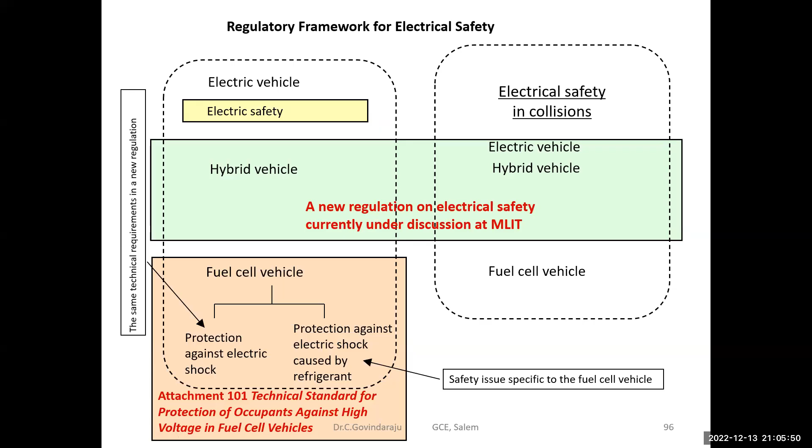Yeah, this is a very important thing. So is the hydrogen vehicle dangerous? Hydrogen gas is highly flammable. It can form an explosive mixture when mixed with the air. So we need proper protection while storing the hydrogen and while using the hydrogen.

But hydrogen is safer than petrol and diesel, because it is lighter than the air; hydrogen is the lighter gas. So even with any leakage, it will easily mix out with the environment, so that will not affect much. But a lot of research is going on in hydrogen storage systems and the safety standards with respect to hydrogen handling.

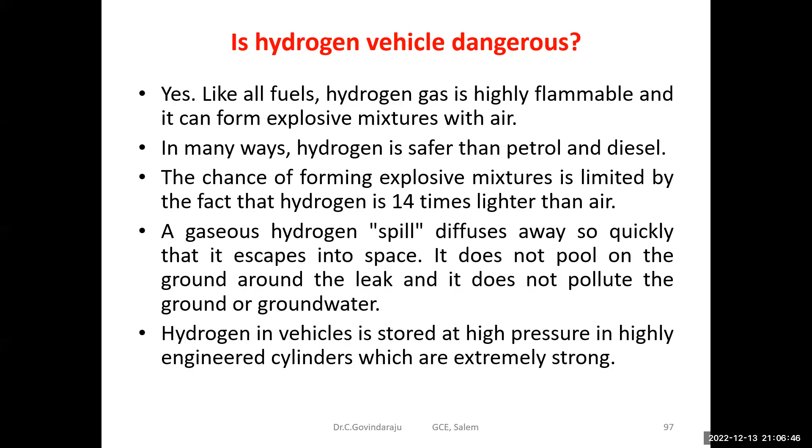Even though a lot of research is going on in the fuel cell electric vehicle and electric vehicle, they are facing a lot of technical challenges. One thing will be cost. Though technologically it is a proven one, the fuel cell electric vehicle is in the market, but the price is a little higher, so people are not preferring the fuel cell electric vehicle.

Another thing will be the refuel infrastructure, like our petrol pump and diesel pump. So we need hydrogen fuel stations in all places, and a lot of work has to be done for the creation of the hydrogen refill infrastructure. Then the safety, a lot of research is going on on the safety issues, insufficient vehicle range. Another thing will be the starting mechanism at very low temperature. Again, how to increase the power density of the fuel cell. Nowadays, higher end fuel cells are available with high power density. That is not a problem.

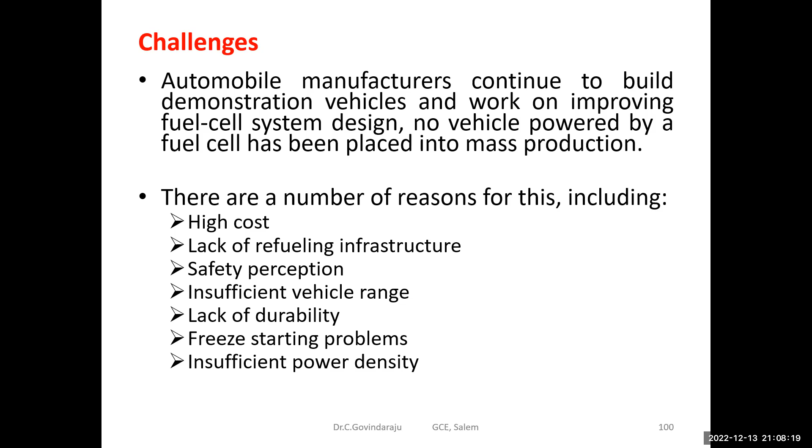So we have some research issues also. You can work towards energy storage systems, both hydrogen energy storage systems as well as electrical energy storage systems, BMS battery management systems, and vehicle management control. Then power electronic design for the fuel cell electric vehicle. Then the powertrain system integration for hybrid electric vehicles. So you can work in this particular field.

And also you can think about a single converter that should operate in constant mode, accept variable DC, and be capable of producing AC output with low THD, meaning harmonic free output. Another thing, while designing the converter, the current ripple of the converter decides the lifespan of the fuel cell. If the current ripple is low, that will increase the lifespan, because the costliest system in the fuel cell electric vehicle is the fuel cell. So the fuel cell lifespan is very important.

Another thing, you can design the converter, inverter, bidirectional converter and bidirectional inverter with reduced losses and improved efficiency. Another very important thing will be modularity. All the converter systems should be modular in nature, so that we can increase the size and the power rating. Yeah.

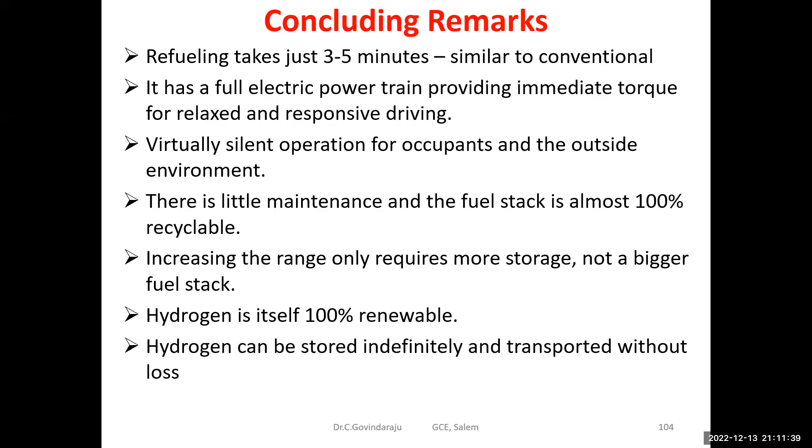Hydrogen is 100% renewable, so it is available free of cost. Only we are spending the cost for the hydrogen production. The source for the hydrogen production is free. Hydrogen can be stored and transported without any loss. That is not a problem. So with this advantage, definitely the fuel cell powered electric vehicle will dominate the electric vehicle market. So that is my conclusion. Thank you.